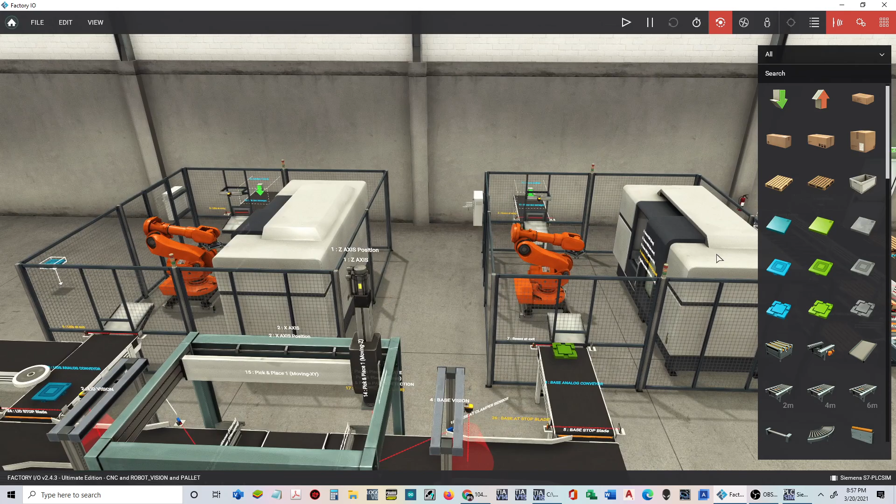On the left side over here, it's gonna be making the covers. So the covers pretty much look like this. It just has a little four quarter at the bottom like that, and the right side CNC right here is gonna be making the bottom base. So the bottom base looks like this.

So it basically has four slots right here, and you practically just put this right on top of it, and it'll just basically sit on it, and you have like a little, I guess, a little Lego part, something like that. But we'll be making blue and green randomly from each machine.

How this is gonna work is I have a vision right here. It's gonna determine if this is a blue or green, and same thing over here for the base. It's gonna determine if I have a blue part or a green part.

And once they get into this conveyor, it's gonna get scanned, and they're gonna get clamped by these two position clampers right here. And once they get clamped, based on the decision of the logic that's saying, are they a match? If they are a match, then this robot right here is gonna grab from the left, which is the lid, and assemble it over here.

Then it'll just pop up and it'll come onto this whole conveyor, and it'll just flop down to this. I'm supposed to have more logic after it drops down here, but this is as far as I got for now. I need to basically build more conveyors and do more things. I don't know what I want to do yet, but that's as far as I got for that part.

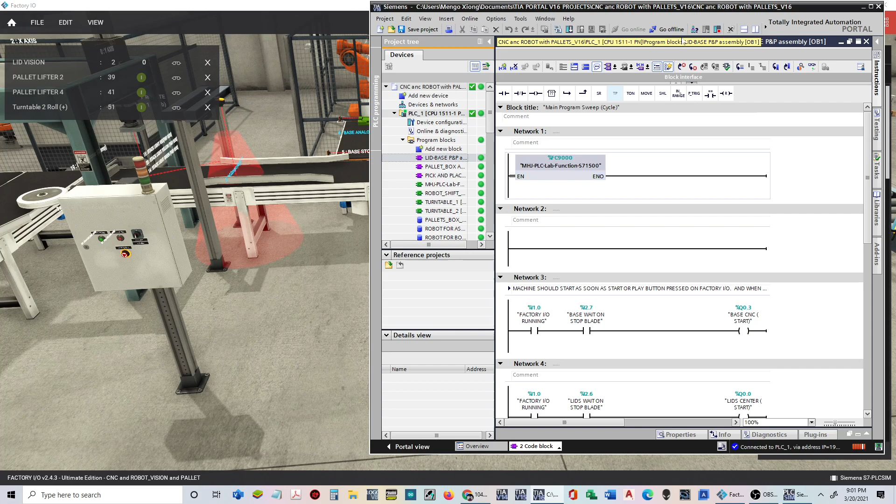I guess let's just go ahead and see what it does. I think I'm online already. Let me see. Yeah, I'm online. Okay. And we'll press play right here.

Make sure it's not too loud. Yeah, that is kind of loud. Hold on 1 second. Let's turn that lower. Alright. Do it again. No, I'm not online yet. Yeah, sorry about that. Yes, yes. Here we go. Alright, let's redo it. Okay.

Alright, it clamps on. It's not the same color, so it's gonna kick it out. It's gonna keep on doing this until I get a green one up here. So that is what it's doing on this side. On this side over here, it's gonna pick it up and put it on. It's gonna measure it, and we get a green light if it's good.

But let's just say if it passes there, I have a second check here. Let's just say if the box is not good, it's gonna go to a second check and it's gonna kick it out. Alright, it kicks that one out, but if it has a good box, it's just gonna keep on going past through. So that's the logic for that. And these two are the same.

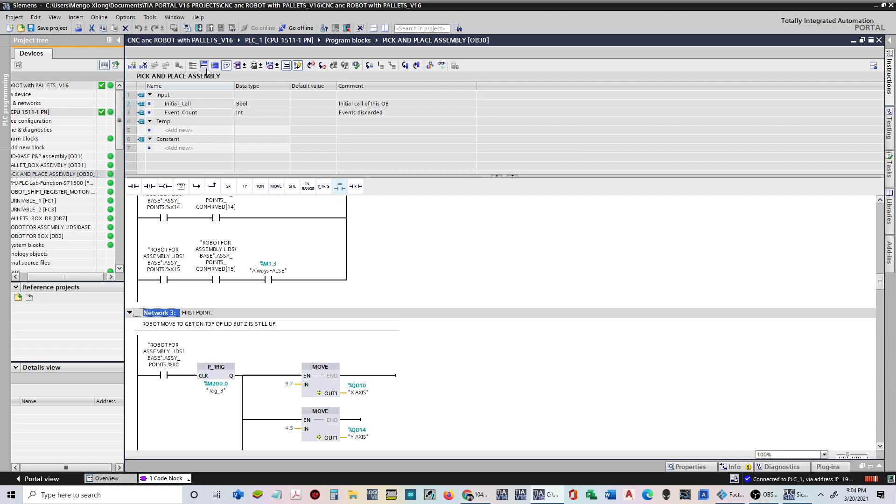And let's read this. We have the pick and place for the lid and base. I have the pallet assembly. Then we have the pick and place assembly. So there's just a lot of stuff. Let me go ahead and maximize all that. Open all that. So this is for the lids. For the robot, it's gonna do a shift left register for this. It's gonna have a little sequential motion for that.

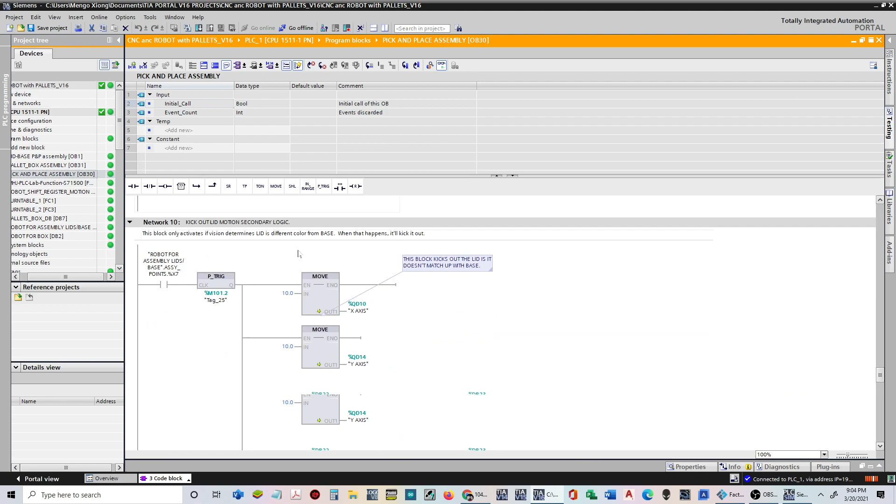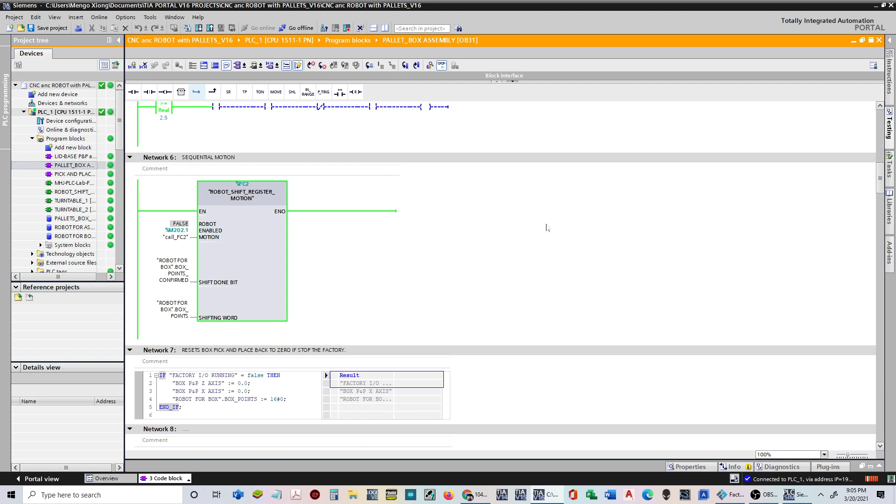And for the boxes side right here, for the pallet in the box, it's gonna have a lot of monitoring the height difference. So I'm gonna do a lot of range, how high it is according to the sensor, and we'll either reject it, or we're gonna kick it out, or we're gonna keep it.

So I have a lot of good information here, and really the point is just to show you what good programming looks like with good information and good comments. You really want to keep that to a T. It's really critical for whoever's gonna be looking at your program. If you have really good documentation and comments and try to make sense of it, that's pretty much gonna be very valuable in the automation field.

For example, every network or rung, I will pretty much explain what is the point for this rung. So it's turntable decision based on the final pallet height checks, and that's gonna tell you what it is. Some people don't realize that you're not the programmer, so you don't know why it's labeled that way. So I have an input called decision A, decision B, but what is that? So I basically laid out for them what it is: to accept the pallet to pass through, and if decision B is on, it's the reject to turn the table to kick it out.

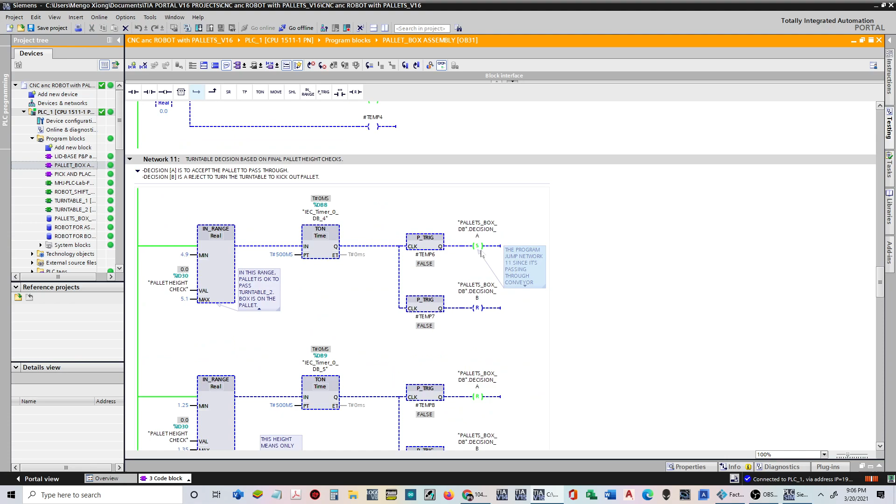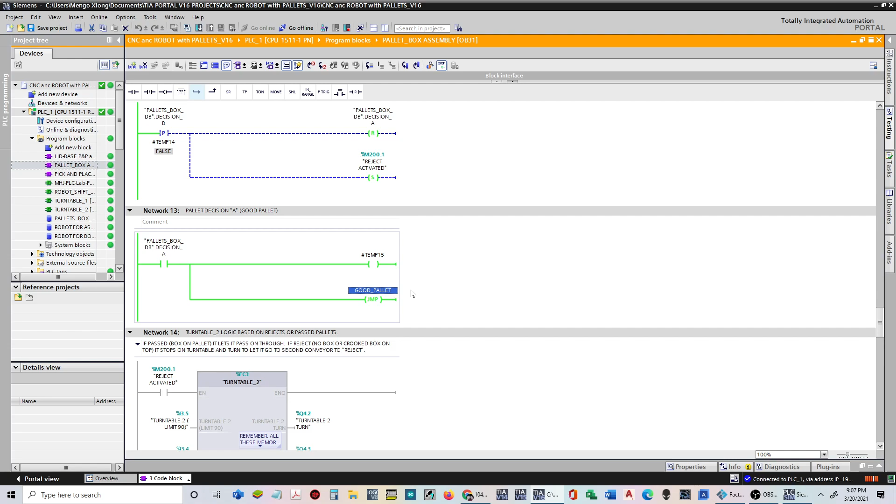So if this is set right here, that means it's a good pallet. And if it's set down here, that means it's a bad pallet. And I even put comments right here. It jumps, you know. If you follow that, it goes over here, then it jumps. You see the jump there? It's gonna go to the good pallet network, which is over here. So basically, from here, this little thing's gonna get jumped on. So we're just gonna skip this whole function right here.